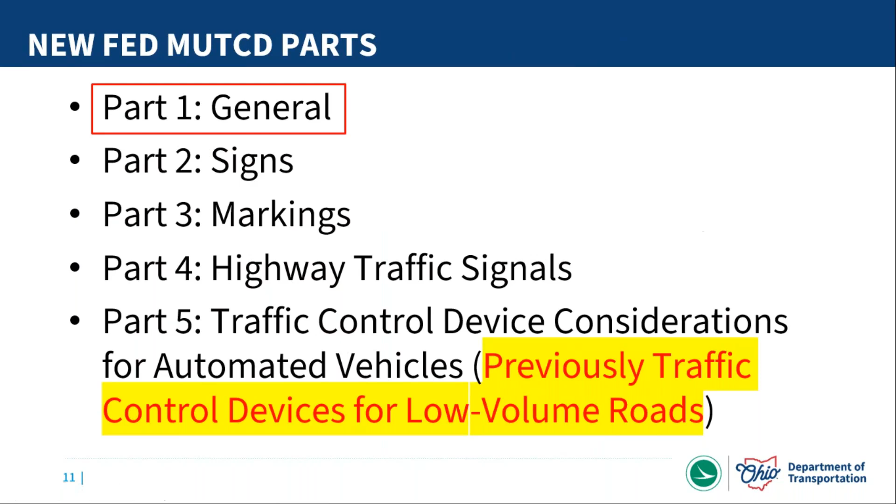So if it's mostly related to signing a low volume road, you'd find that information in part 2, markings, etc. Part 5 has been completely redone, with the emphasis now moving towards traffic control device considerations for automated vehicles, since that is obviously becoming more of a concern as we move forward.

Moving on to slide 12. Just looking at the remainder of the MUTCD parts: part 6 is our temporary traffic control, so construction type traffic controls. Part 7 is traffic control in school areas. Part 8 gets into railroad and light rail crossings and the traffic controls related there. And then part 9 gets into bicycle facilities. And then we have the appendices, which we'll cover today.

Part 6, if you're interested, that is session 4. Part 7 and 9 are part of session 5, if you're interested in that training. And then part 8, we lumped together with parts 4 and 5. So if you are interested in any of those future trainings, check those out on the LTAP site.

All right, so real quick, want to talk about how to use the new MUTCD and Ohio supplement. We realized going from one document to two we're adding some additional requirements there, but we wanted to try to make it as simple as possible.

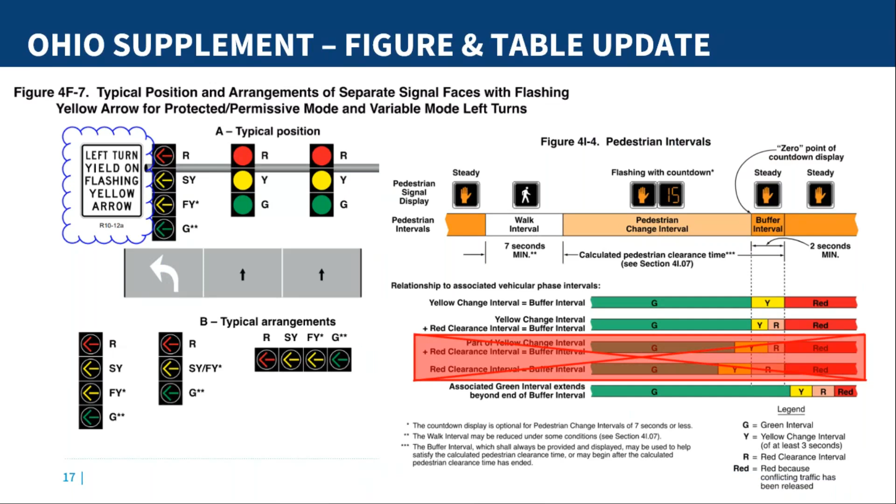Slide 18 here, just real quick, want to talk about the paper manual. We've had some questions on this already, and based off our current policies as a department, we discontinued the policy of providing paper manuals in general, and this is no exception. So this document, the Ohio supplement, plus the national MUTCD, are both available online. You can download any information that you would want if you did want to make paper copies.

Want to talk a little bit about known errors and updates. With the content in the Ohio supplement, all we are doing as far as known errors, if there was a known error in the national document...

The only time that we would be incorporating that known error into our Ohio supplement is if it was directly related to the Ohio specific content. And there were a few examples of that throughout the Ohio supplement.

And actually going this route has already paid off with the release of revision 1 of the national manual. Now we don't have to go back and just make changes just because known errors are now part of

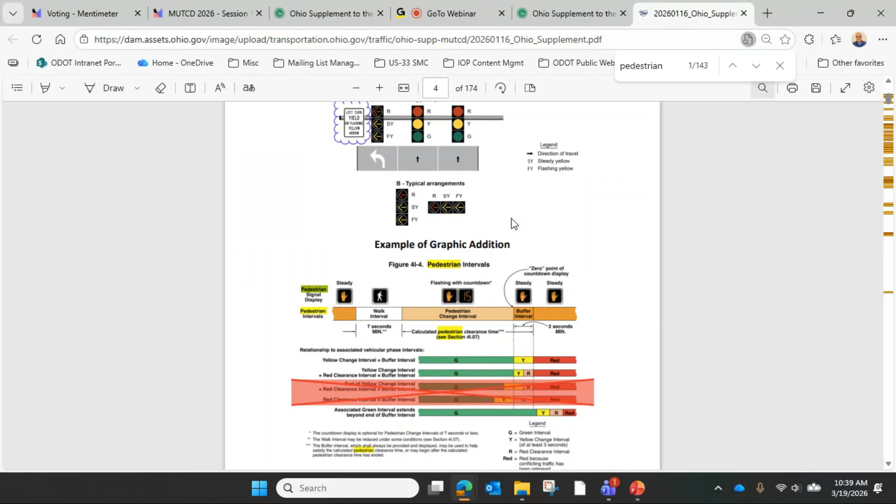Another thing to mention - we did our best to make all of the material here searchable. So if you're in the document, you do Control+F, come up with your search bar. I'm just going to type in pedestrian because I know that'll give me some hits. So what we did, and I wanted to illustrate this - even in the figures that are part of the Ohio supplement document, the text associated with those figures should be searchable. You should get hits if you're searching for a particular term that happens to be text within the figure document. So I wanted to make sure everyone was aware of that as well.

Let's see here. I'm going to jump out of the web view, go back to the slides. So we're back on slide 22. I'm going to keep moving here.

Before we get into the deeper dive on the details of part 1 and the appendices, I wanted to talk about the fact that it's been a long time since the National Manual was revised - it dates all the way back to 2009. So there was a lot of changes with this new manual, and what we found, going through all of this, a lot of content was moved around and reorganized into different areas. So if you were familiar with the old manual, it may take a little time to get used to where some of that information's been moved to, but for the most part, most of the information is still there. It just has maybe been reorganized and moved into a different location. So I want to make sure everybody's aware of that. In general, in my opinion, and several others I've talked to, that reorganization makes a lot of sense. I think it helps in finding your way through the document, getting to the material that you're interested in.

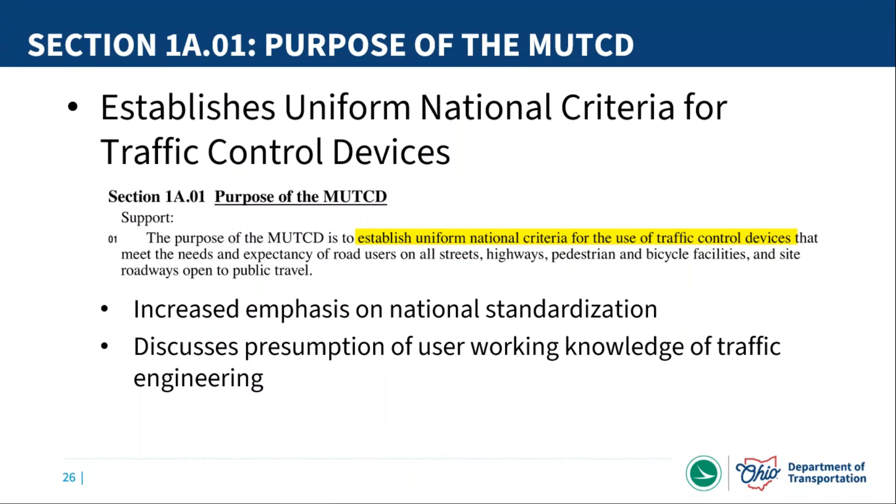Moving on to slide 27 here. TCDs, which I just abbreviated to fit the slide a little better, stands for traffic control devices. This is the general description.

Throughout this presentation, so if you take these slides away with you for reference down the road, pretty much any section that is covered within the Ohio Supplement, I made a note generally towards the top of the slide and highlighted it so it stood out, if that's helpful to you going back through this information.

So again, talking general description, what we ended up changing with Ohio specific content was the definition of traffic control devices. As you can see here, we added flaggers to that definition. The reason being is that our Ohio Revised Code included flaggers with our definition of traffic control devices, and working and coordinating with our legal team, we felt like that was important to make sure that remained moving forward.

Also, I want to point out that this particular section talks about several things that are out in our roadways but are not necessarily traffic control devices. So we're talking things like curbs, rumble strips, fencing, roadside attenuators, that type of stuff.

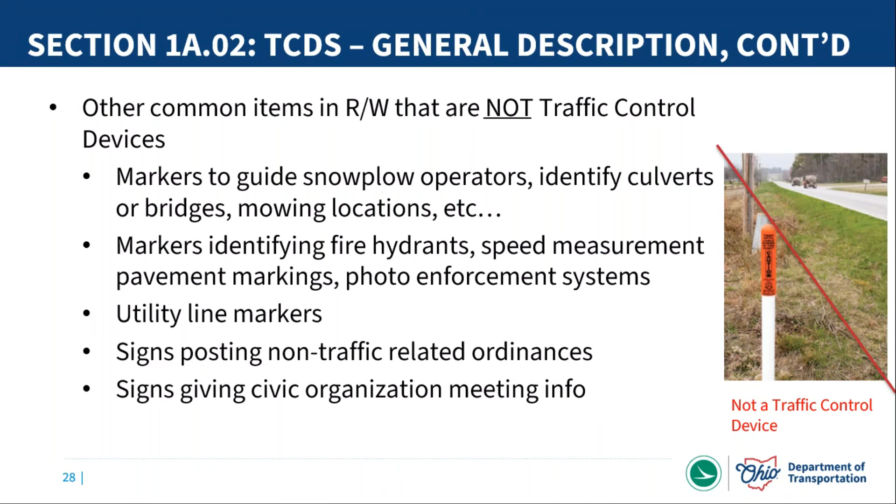Another thing just to point out real quick, identifiers for culverts or bridges are not considered traffic control devices. I just want to put an asterisk there - we do provide signs for that, and we have those signs available out in our reference information. We do that primarily just for the convenience of our maintenance folks and others, just to help be able to locate those assets all throughout the state.

Moving forward to slide 29 here, talking about target road users. A big emphasis with this release of this manual was to include more information to address our vulnerable road users - we're talking bicyclists and pedestrians, others with disabilities - and that was even mandated by federal law.

So in this document, one of the big pieces of new information kind of sprinkled all throughout the manual is some more information that's targeted towards those vulnerable road users. So be aware of that, and be aware that if you're working on a project, you need to take into consideration all of the potential road users and make sure that you can optimize the space and the traffic control devices for all of those different users.

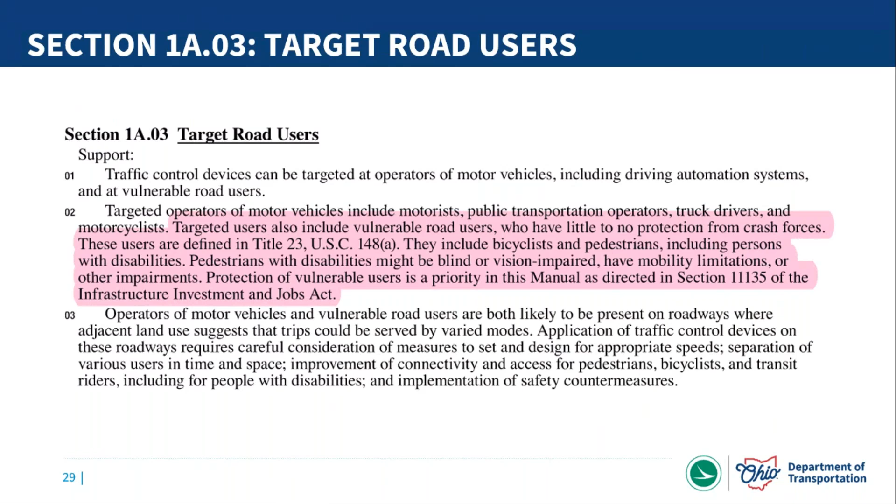Moving on to slide 30, use of the MUTCD, this is section 1A04. I just highlighted this paragraph 2 portion, and I'll read it off real quick: where the content of this manual requires a decision for implementation, such decision shall be made by an engineer or an individual under the supervision of an engineer.

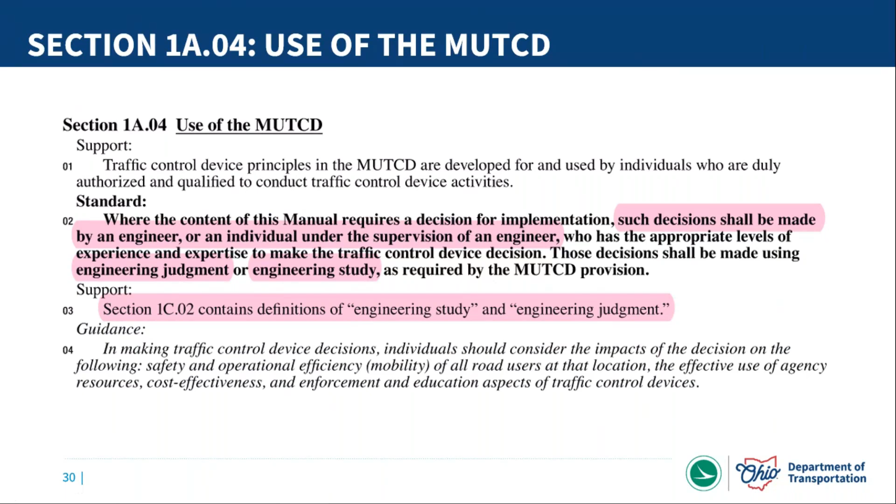Again, like I said earlier, that's an area in this manual that there's definitely some increased emphasis. Further down in that section, the terms engineering judgment and engineering study are brought up, and we'll take a little deeper look at that here a little later on. But that's, again, a big emphasis area with this new release of the MUTCD.

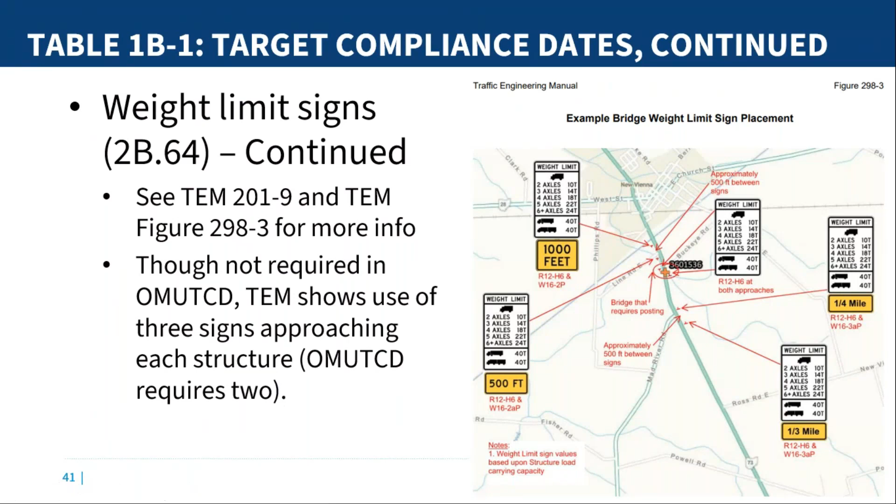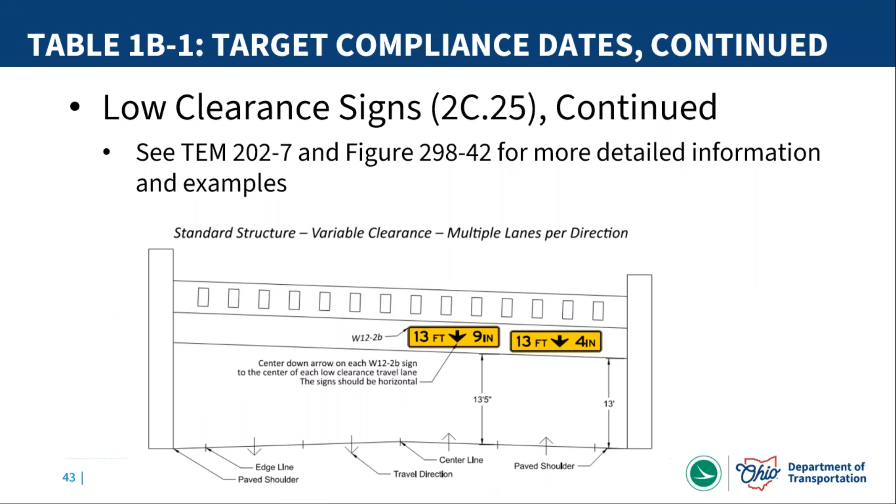Moving on to slide 44, the next compliance date is maintaining minimum retroreflectivity, and we're talking about pavement markings. This is not new. This was added with the previous manual, but since the deadline date was still beyond the release of the new manual, it was still added in here. This deadline date is coming up quick, September 6th of this year.

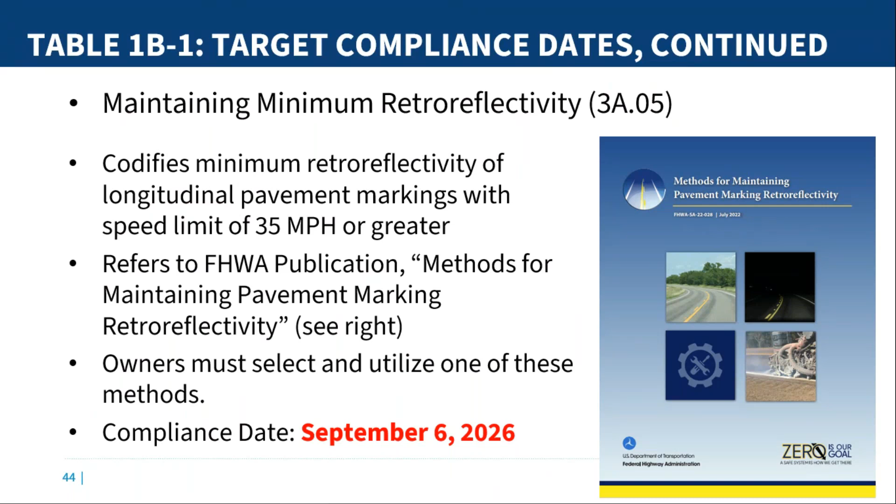ODOT is addressing this by working with a consulting firm to evaluate life cycle based off geographic location and traffic volumes. That's how we're looking to address this. There are several different methods that folks can use, and I won't take a deep dive, but you can look further into that if this is something that is needed if you're responsible for maintaining pavement markings at your agency.

One thing I just wanted to go back to on that slide. One thing to mention for the local folks, there is a research project going on now, pavement marking selection for local public roads in Ohio. If that's you, take a look at what our research office is putting together. There's more information there.

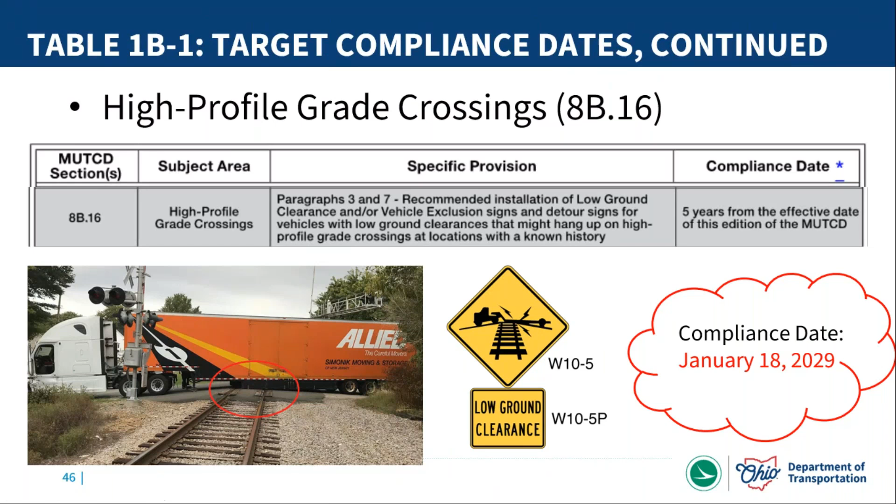I'm going to keep moving here on to slide 46. The next one of the target compliance dates has to do with our high profile grade crossings. These are, as you can see from the picture here, rail crossings with pretty steep grades approaching and as you leave the crossing, and sometimes trucks with lower bellies will drag or get caught on those. So the idea here is to provide some signage and potential detour routing for those types of vehicles. Again, that's a January 18th, 2029 compliance.

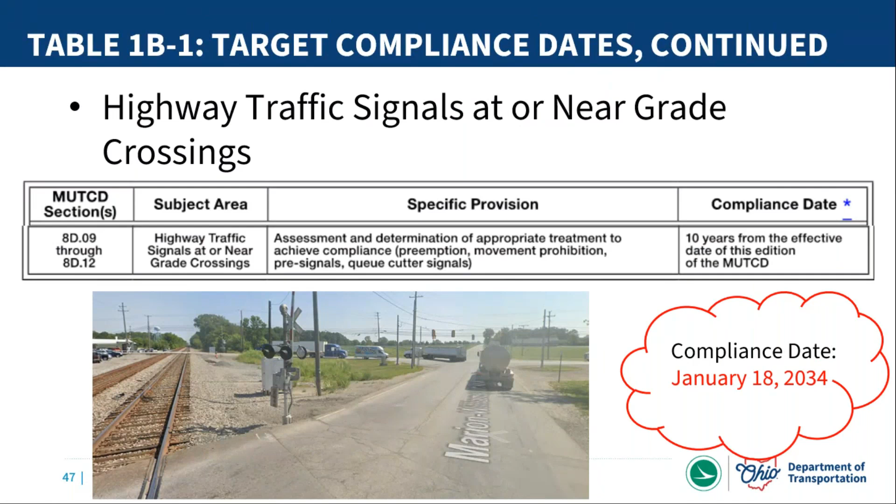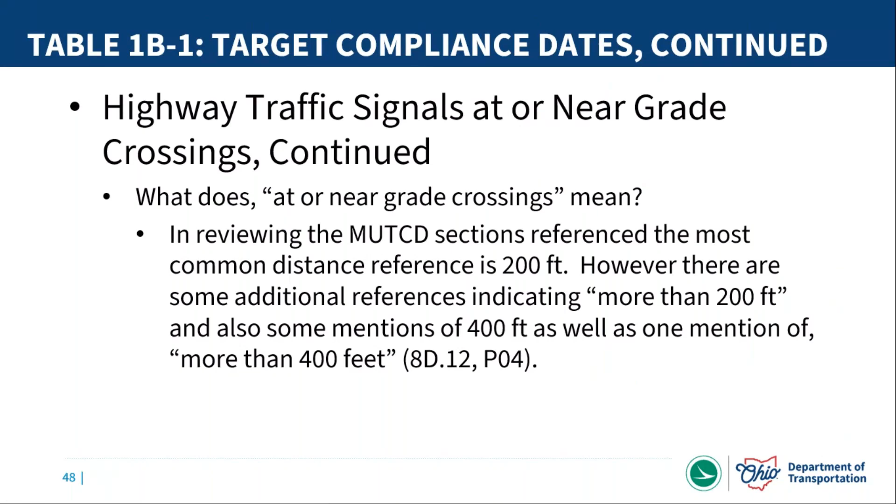Moving on to slide 49, interpretations. This section talks about the FHWA interpretations on your unique situations, other clarification of the manual. This section also includes all of the information that any agency or entity that is requesting an interpretation needs to pull together before you submit that request.

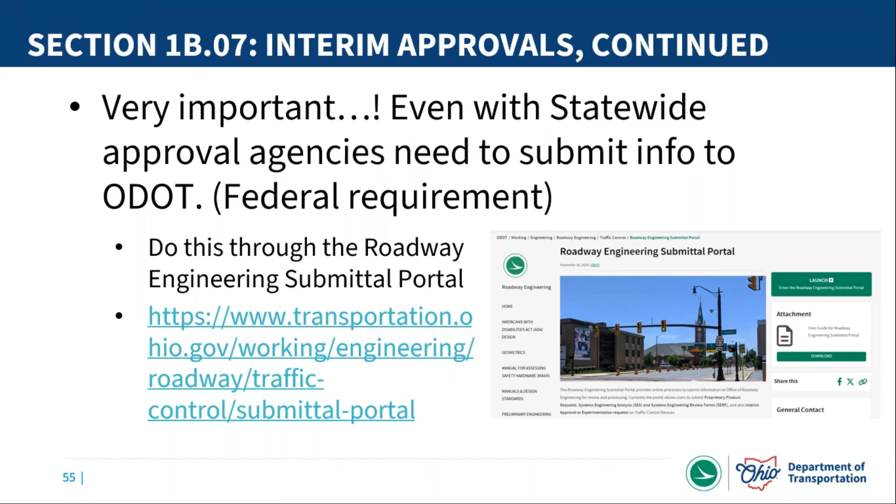Moving on to slide 56, I wanted to show some examples of interim approval items from the previous manual that are now incorporated into this new manual. On the left-hand side, we've got one of our RRFBs - there's now a specific section in the MUTCD that addresses these, so they're no longer interim approval items. Similarly, this is an example of an intersection bicycle box - those used to be interim approval items, no longer; they're part of the MUTCD. Here in the bottom right, kind of hard to see, is a two-stage bicycle box - also now part of the new MUTCD, so no longer an interim approval. And at the top right, you've got bicycle signal faces that are now part of the MUTCD.

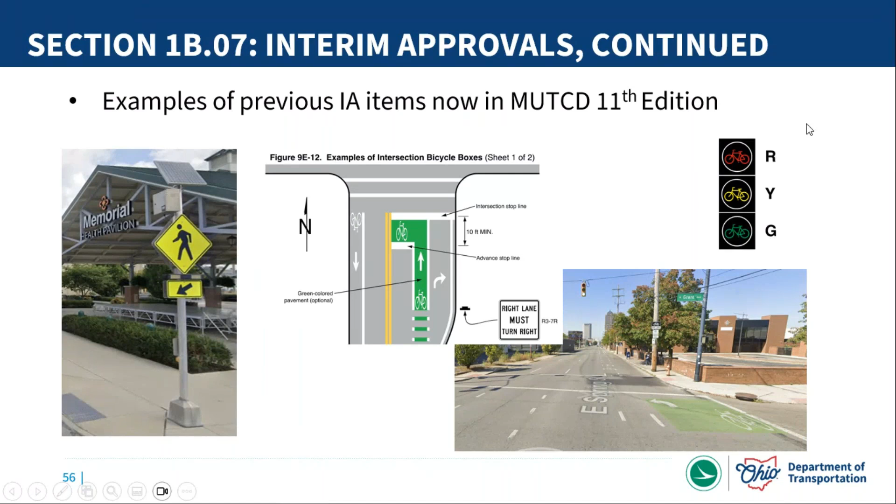Transitioning here, I wanted to spend a quick bit of time and do a little interactive quiz with folks. I'll set this up for you and explain it.

So the question I'm posing to everybody is: how do you legally make a left turn while heading westbound on Spring Street to go southbound on Grant Avenue if you're on a bicycle? Let's move to the next slide.

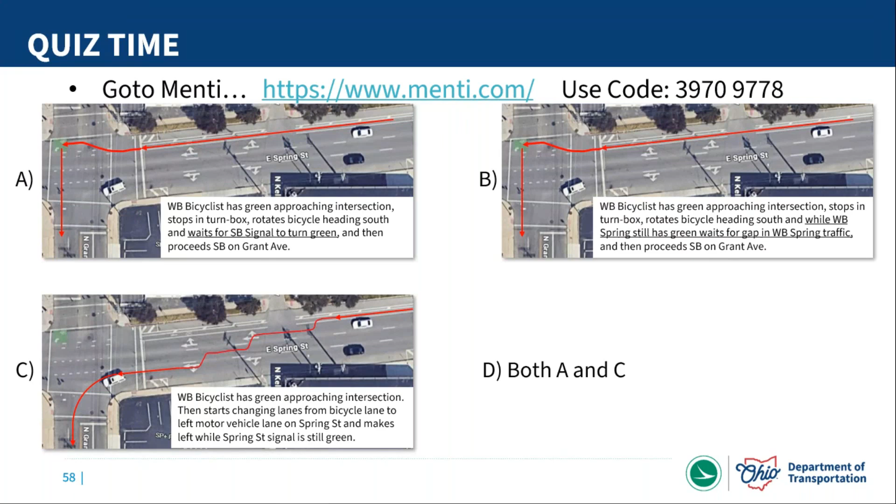And then your option D is both A and C. So let's jump from here. I want to jump to the Menti poll and see what everybody's thinking here.

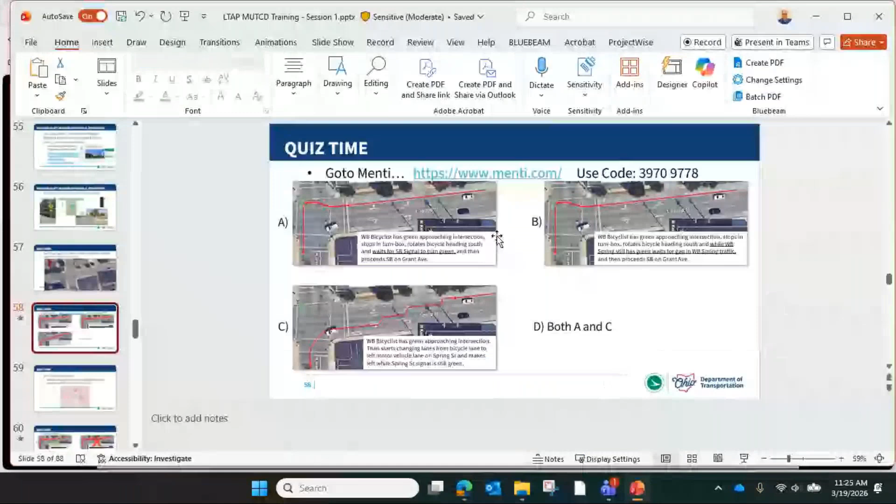I'm going to jump back to our slides and get them going again. So as far as the answer for that — I'm sorry, it's a little bit of a trick question, not really, but a little bit — definitely A is a legal movement.

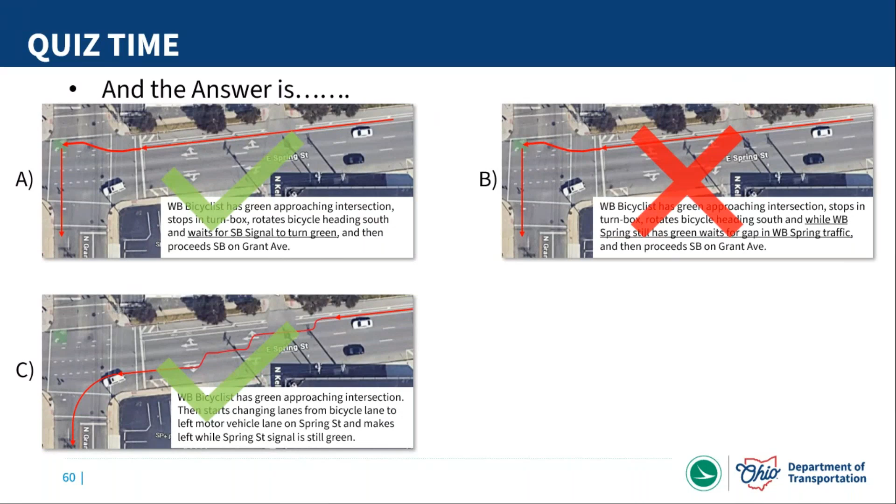B is definitely not a legal movement, but unfortunately we do occasionally see some bicyclists still doing that, and I think there's still some misunderstanding on the proper use of the two-stage bike boxes. C is also okay, it's legal — not one I'd certainly recommend if you've got high volumes, but it's legal. A bicycle, once out into the normal traffic lanes, is a vehicle, so they could make that movement. So your answer is D.

For those that chose D, if I had candy bars to virtually give to you, I would hand those out now. But since we're all virtual, we'll have to wait — you'll have to send me an IOU.

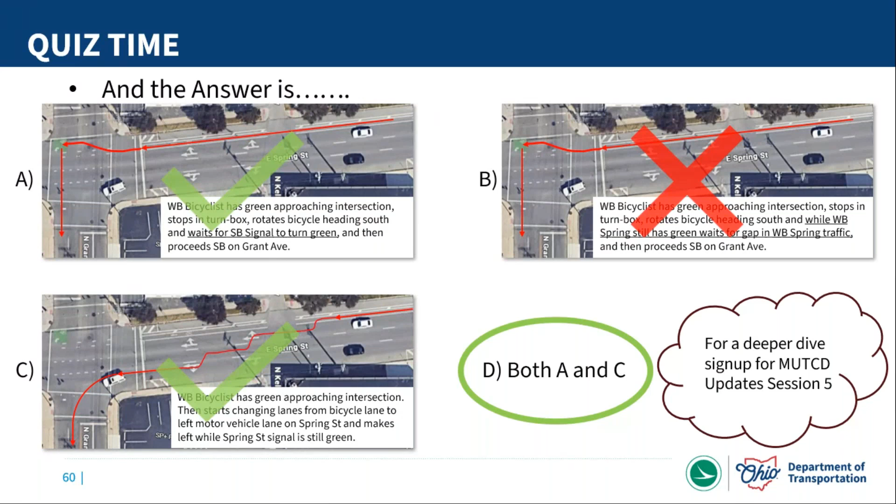Moving on, so we're on to slide 61. And can everybody still see the screen share? Sometimes that's been a problem.

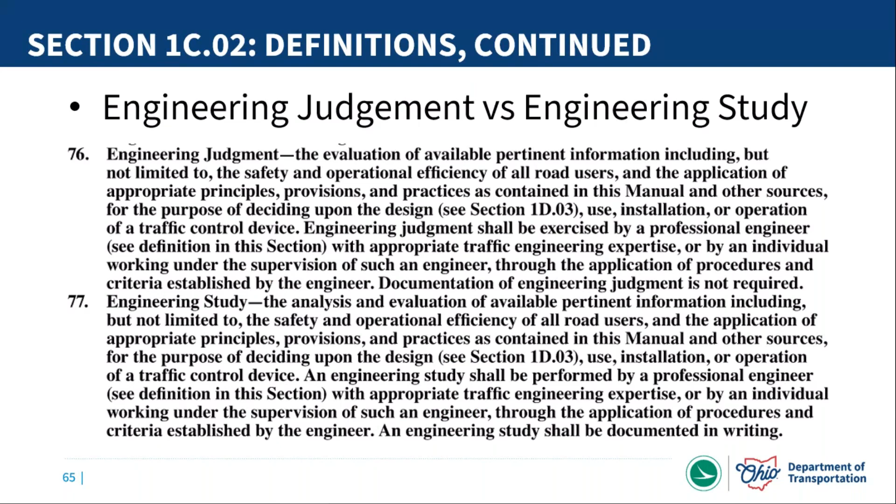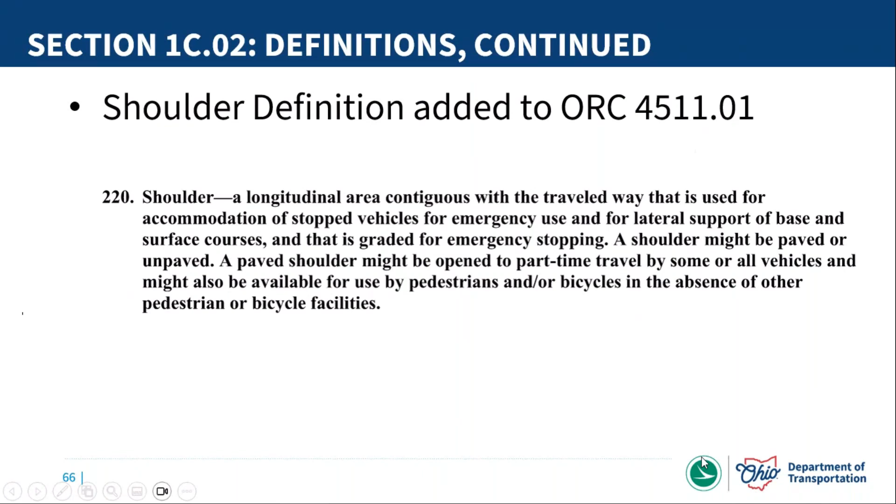One thing I also wanted to point out in the definitions section, slide 66, this is a completely new addition to our Ohio Revised Code - this was not specifically addressed. So the definition for shoulder, essentially what we did in our Ohio Revised Code is we utilized this MUTCD definition with no changes, but I just wanted to point out that that is a new addition to the ORC.

So another thing to point out, we talked about private roads. This new MUTCD changed the language there. Previously it was called private road open to public travel. With this new MUTCD, they changed the name to site roadways open to public travel, because in some cases site roadways could be owned by a public entity. That was the main reason for that change. I just wanted to point out that term has changed. That's slide 67.

Moving on to slide 68, the vehicle definition. In a few cases when working with our counterparts at FHWA, they requested that if we had a more significant change with our definition, we show those as a separate standalone definition. That's an example of that. In this case, we've got our vehicle definition from the Ohio Revised Code as definition 284A. If we did have to do that, we would just add an A, B, C, whatever to that number.

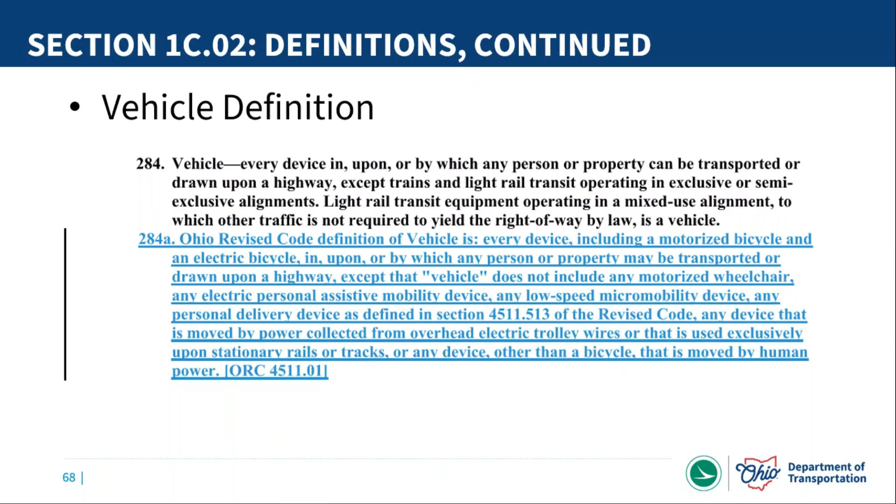All right, we'll speed things up a little bit here. Looking at acronyms and abbreviations, this is the Ohio Supplement, which just explains all the different acronyms and abbreviations used throughout. Chapter 1D, we'll jump into that, slide 70.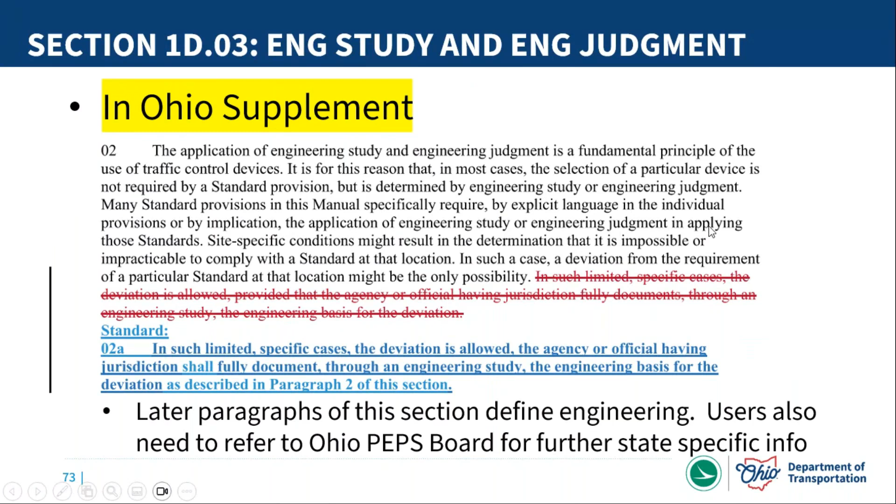I'll keep moving here, slide 74, design of traffic control devices. This talks about your basic principles of traffic control devices. Except for symbols or colors, minor modifications of those elements may be made based on engineering study or judgment. But the overarching thing is that standard traffic control devices are set up with the colors, symbols, etc., for a purpose and a reason, and there needs to be good reasoning to deviate. Some traffic control devices you cannot deviate.

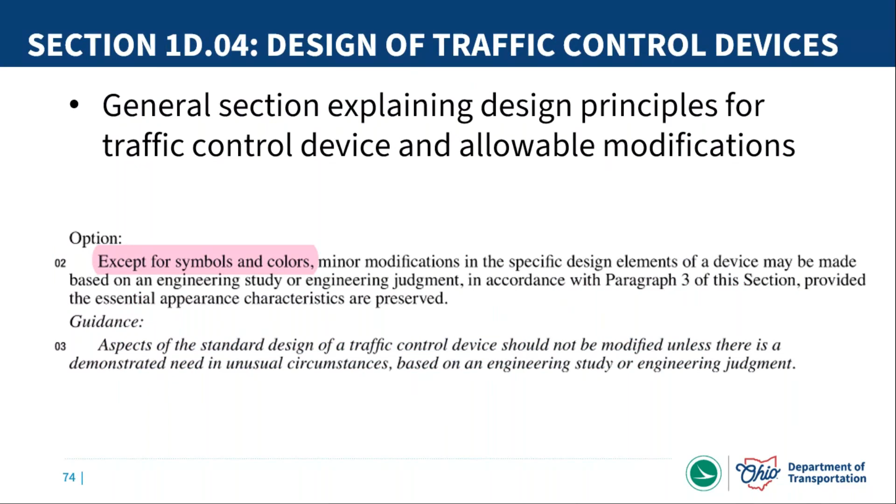Moving on, slide 75, color code. This lays out all of the different colors for the different types of traffic control devices. Not going too deep here, but if you're curious about why a particular sign or device is a particular color, it's coming from here.

1D06, public domain copyrights. This section gets into, say, if you were experimenting on a new traffic control device, what information has to be publicly available and what can still be copyright protected is what this section covers.

1D07, advertising, slide 77. Basically the gist here is that advertising messages on traffic control devices is prohibited. There's a few instances, like our logo signs, where company information is provided, but there are some pretty specific requirements there.

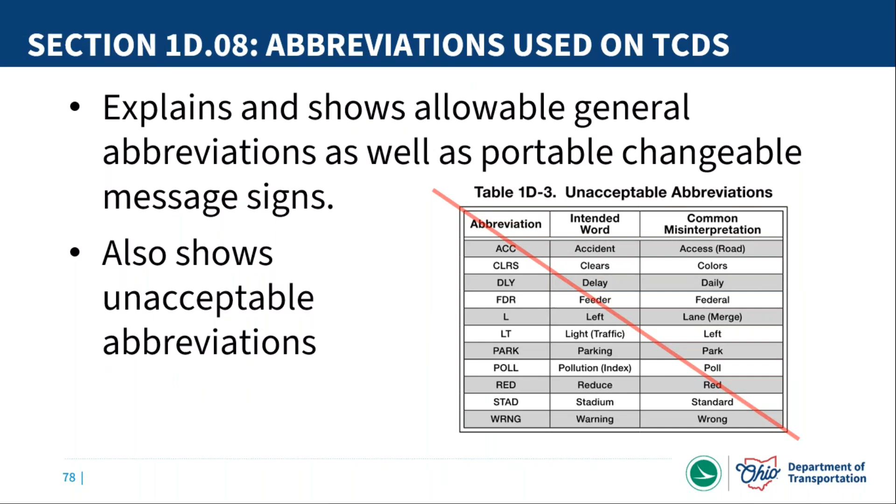Abbreviation, section 1D08, talking about abbreviations. There's a table that lists unacceptable ones, shown on this slide. It's important if you're a changeable message sign operator that you're aware of these abbreviations and not using those in your messaging. Slide 79.

Placement, operation of TCDs. This gets into placement. Just in the interest of time, to allow a little bit for questions, I'm going to keep moving here.

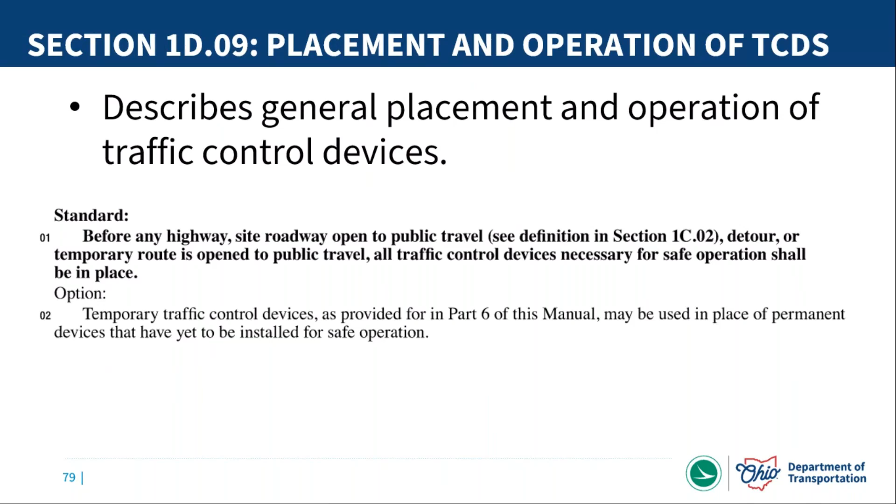Maintenance, slide 80, just talks about maintenance. Here's a couple of example pictures of what we typically do not want to see. These traffic control devices are out there for a purpose. We need those to be maintained so that users can properly see the information. That needs to be incorporated into each agency's plans.

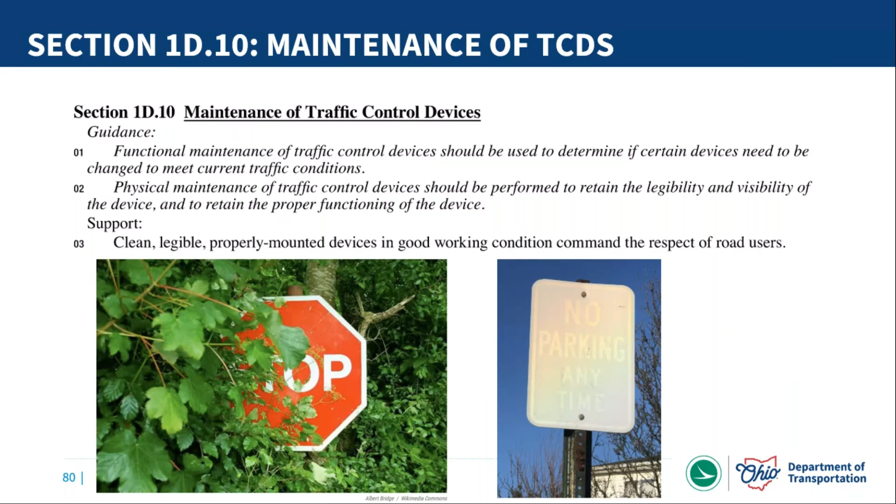Crashworthiness, slide 81. The message here is that TCDs need to be crashworthy. It talks about the MASH requirements. There's some different stipulations depending on the devices, and that's what this section gets into.

Moving on to the appendices. I'm on slide 82 here. So Appendix A1, this has been in previous versions, just lists off all the different pertinent congressional actions related to traffic control devices. It's only 3, 4, 5 pages.

A2 is metric conversions, straight up exactly what's there, just in case you do have some metric information, it has that conversion, those conversion factors.

And then Appendix A3, so this is a new section, part of our supplement. What we did was pulled information in the previous OMUTCD that was in the intro section, and created this appendix, which just kind of maintained the historical information. Moving on to the next slide here, just shows what that appendix looks like, just in case there's any need to kind of look through the history of the development of the OMUTCD.

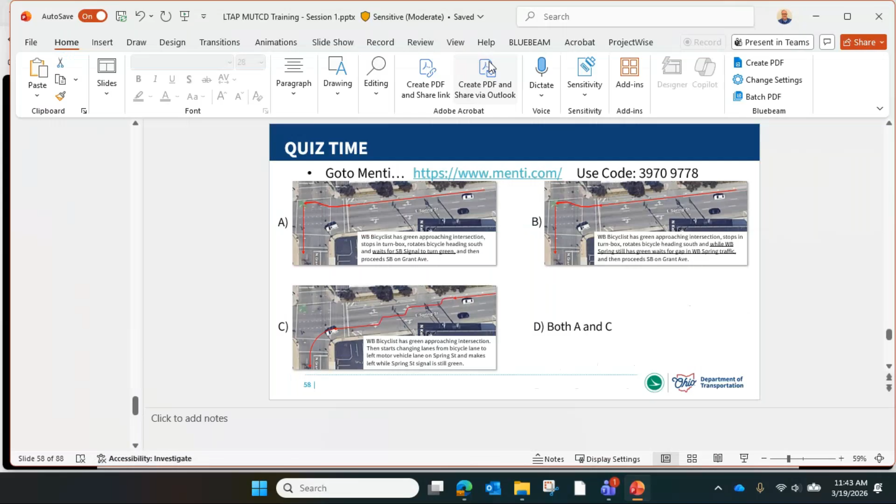Yeah, of course. So we received a question, or it was more of a comment about queuing over rail crossings and that the information lists the distance instead of just discussing the queuing across the rail crossings. It's important to first note that information specifically about grade crossings within proximity to traffic signals is covered in 8A.12 of the MUTCD. It's kind of broken into two parts. The requirement for the evaluation is specifically a shall statement for grade crossings within 200 feet of an intersection, but there is also a should statement that if there is queuing across the rail crossings, those should be evaluated as well. So with that said, going back to what Kevin discussed briefly on the definitions, unless there is a specific engineering reasoning not to evaluate it, those should still be evaluated.